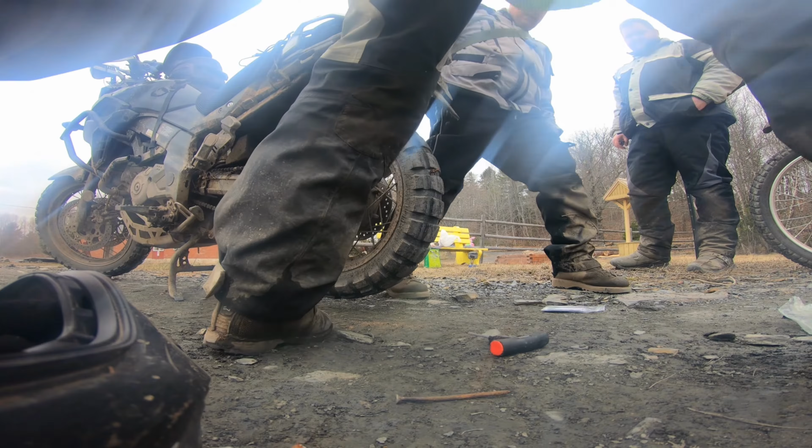That was terrifying.

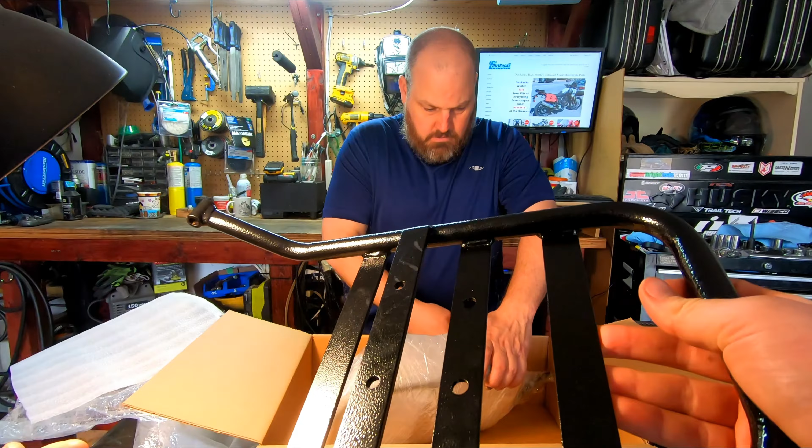Let's look at the welds, they look pretty good. They look good to you, Colin? Smooth and well done, yeah, they've cleaned them up really nice. You've seen us weld on the channel before, as you know we're all about function over form, so when we see nice welds, we give credit where credit's due.

That is well done. We got a kickstand to weld up on the DR. First trip out, Pete managed to break it right in half, yeah, broke it right in half on a big old rock. Well I guess I know what I'm doing later, we're going to weld up Pete's kickstand. And we're not just going to weld it up, we're going to plug it and weld it so it'll never break again.

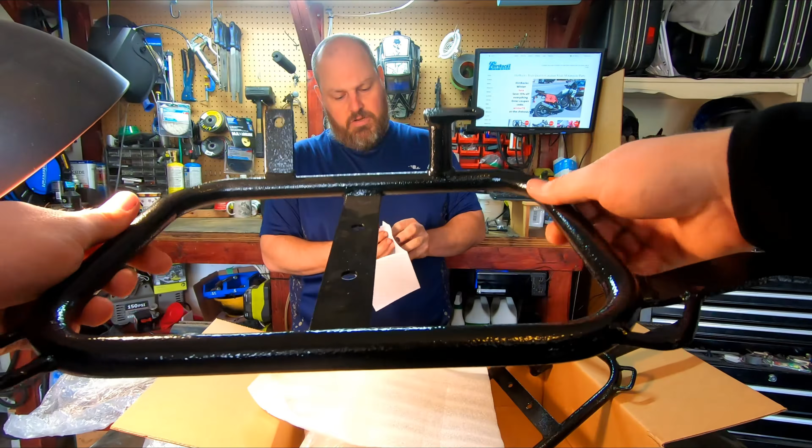Beautiful welds. Let's see, these instructions. They're large, they're bold, they're legible, they're in English. And if you want to know how small of a company this is and how good personalized service you're going to get, there were typos and they corrected them in pen. So somebody personally looked after this.

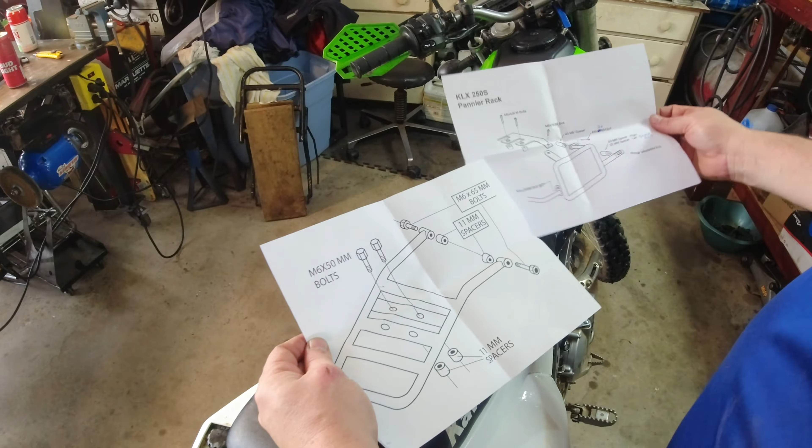Pannier, so we've got, that's the top part. And now the one thing I'm confused off the bat is, do we do the top rack first before we put this piece in? Zip, zippy, zip zip.

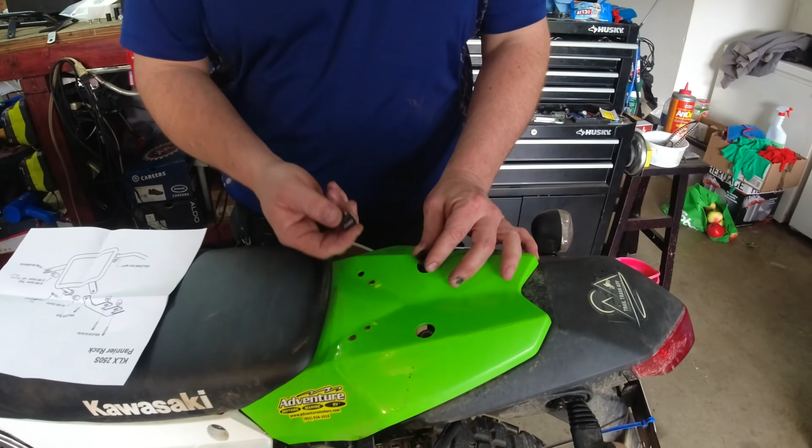I'm not a mechanic, but I play one on TV. So, spacer. I think they probably take up the factory spacers. This comes factory with a little pouch. Boom, just like that. So we've already taken that off, and we installed a Rotopax-style mount, no name brand, for the 5-liter fuel can that we carry, because I make Colin carry all the fuel. Bang, bang.

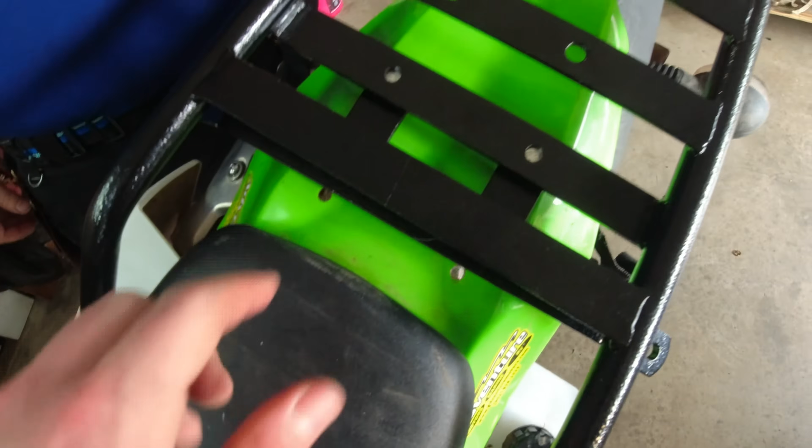So before we bolt that down, let's see where everything's going to line up. All right, so yeah, we're going to want to put that, that's going to line up just like so. So you're going to want the rack on first. Bam, bam, so yeah, I assume that's how they're going to go. So we've got 2 more spacers that go there, and this one goes over here.

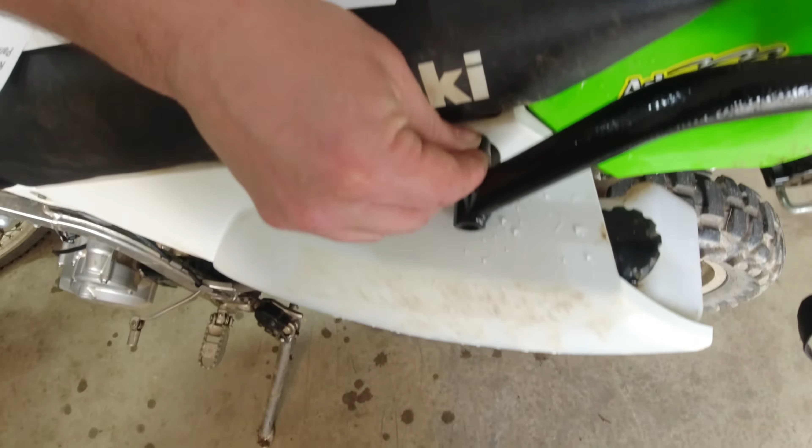Now they give you 2 different lengths. So those should stay in there. Beauty. Now it does say 11 mil spacers, and they gave bolts here. So I don't know whether you need to put the spacers in between here, but I don't think I want to. I want the rack hugging the bottom, so I don't know if we need to put the spacers in there.

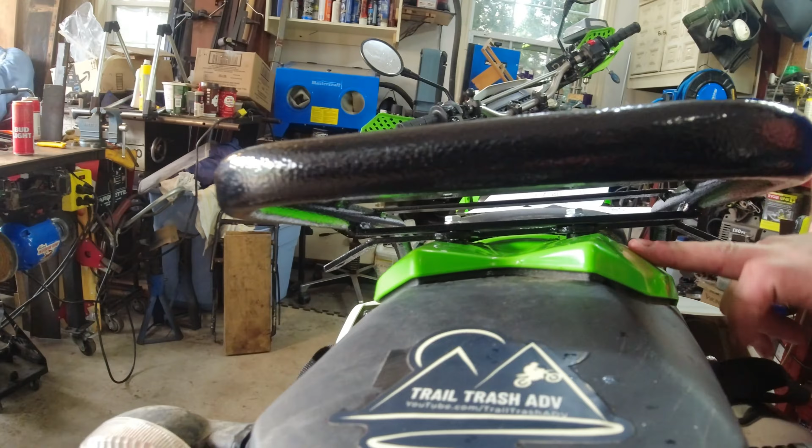And that's not on the plastic. Let's try that for now. All right, yep, so where we are.

Lining these spacers up, I see why they designed it this way, but it is kind of hard to get this in, lining these spacers up. So you've got that spacer, then you've got this, and you got to get this through.

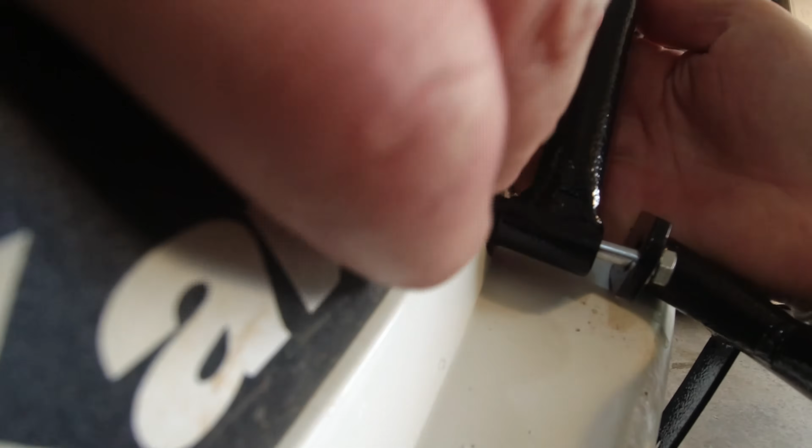I just want to make sure. So it doesn't look like it, but there's actually this main metal piece, and then there's an additional spacer behind it. It's not just 2 separate pieces. So you got 1, 2, and 3. But then this has to go through the plastic, then through the seat mount, and then into the threaded bungs on the frame.

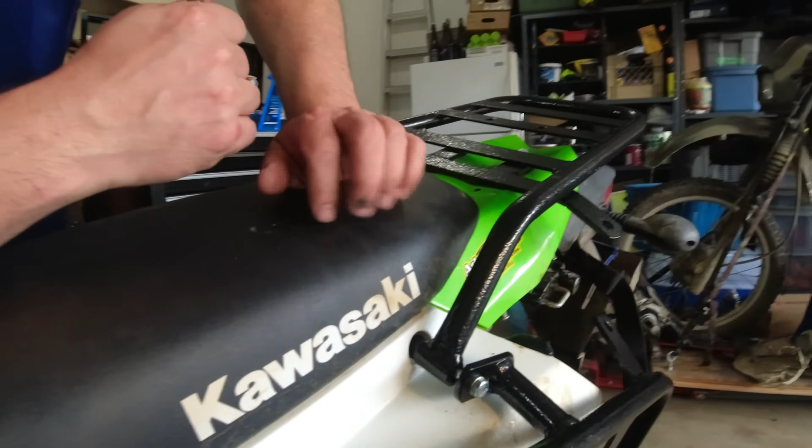So it is not the easiest thing to set up, but I don't think you're going to have any difference with anything else. The spacers need to be designed that way so that you can get them in, where there's a recess in the plastics, so you wouldn't be able to separate this and get them in the plastics otherwise. So I see why they had to do the spacers that way. But full disclosure, it is kind of funky trying to set this up.

So to make everything line up here, I've left things loose. What we're going to do is get these things lined up and then get this nailed down. That's true with any install—don't tighten stuff down until you've got everything lined up where you want.

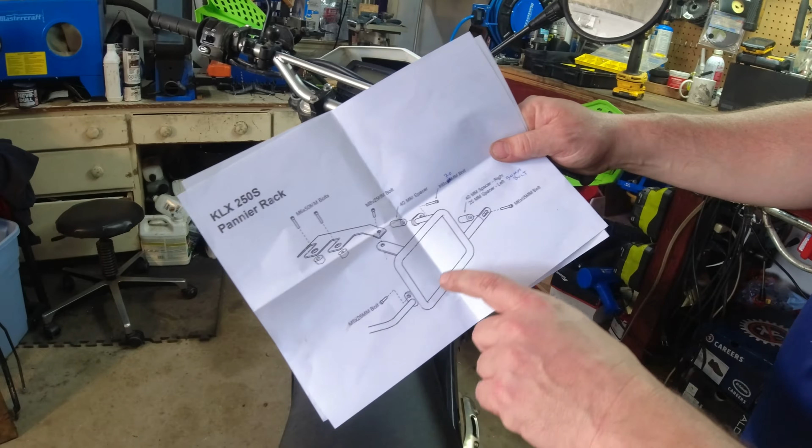Now, the only other thing I'll give them a little crap for is that we have instructions not for the heavy-duty side rack, but for the multi-use pannier rack, because they're talking about a bar that goes around the back here. This bar here. Our set does not have this bar. So we've got the other rack system.

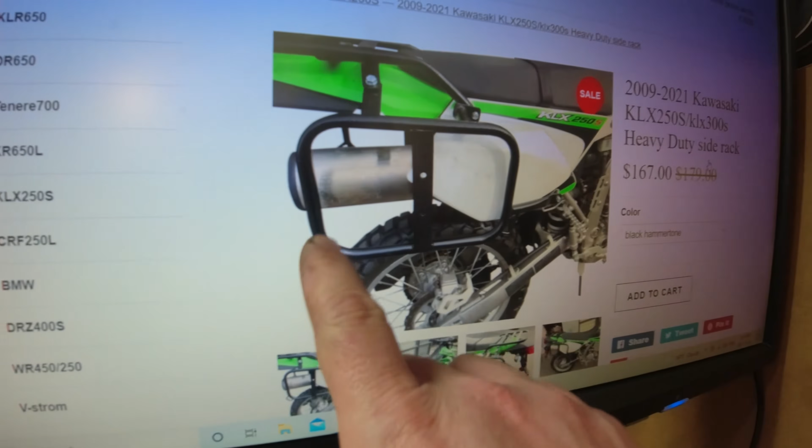If we go back, here we've got the heavy-duty side racks. It's a little odd why they call this the heavy-duty side rack, but it doesn't have the stabilizing bar that goes behind, and the other one's called the multi-use. But yeah, whatever—maybe it's a thinner gauge, and that's why they use the wraparound bar. Maybe, who knows. But this instruction booklet is for that.

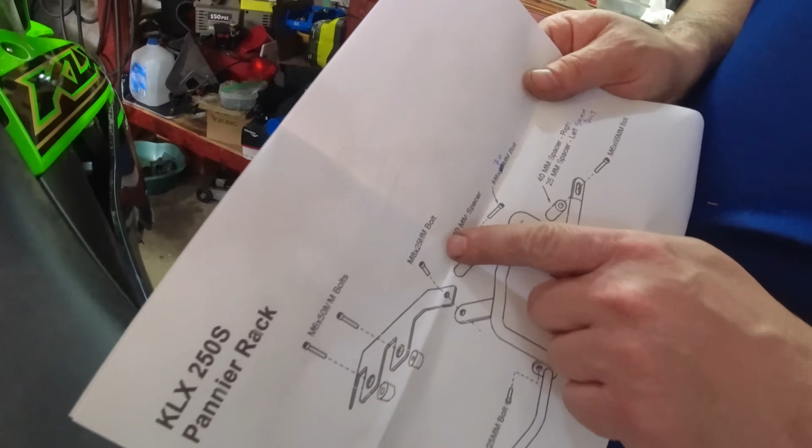So we're going to push on no matter what. The next bolt I want to get in is this M8 by 25 bolt, to get these in.

But so far everything's lining up fine. That wasn't it? No, it wasn't. So anyway, we're going to do this in real time so you can see it is a bit of a frig. But again, you're going to be friggin' no matter what set of panniers you're putting on. I'm not going to gripe about it, because I see why they designed it the way they did—I don't think there was a way around that.

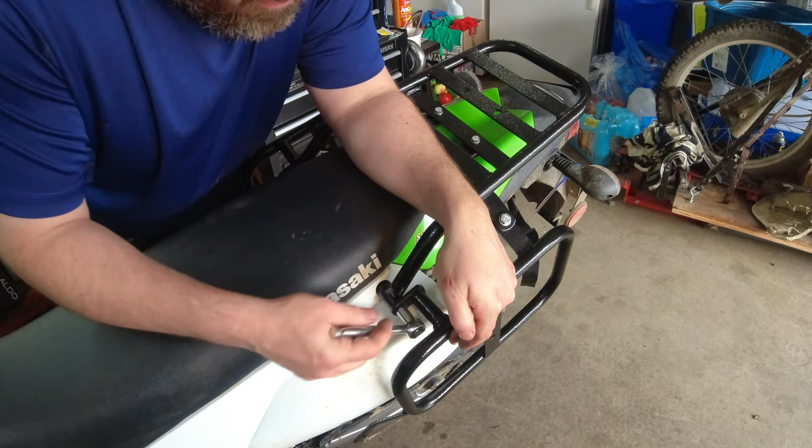What am I looking for? I'm looking for a 10 mil. Let's see if I hit it. Yep, I think so. Okay, so we'll get some nuts on that, and then some lock nuts, which I'm a fan of—hey, lock nuts!

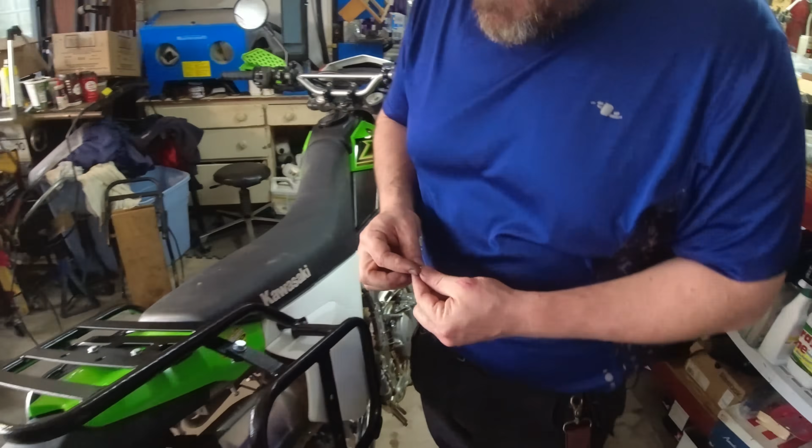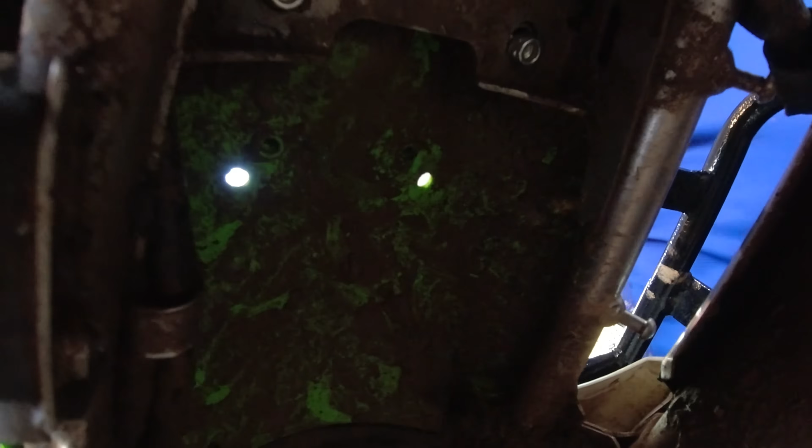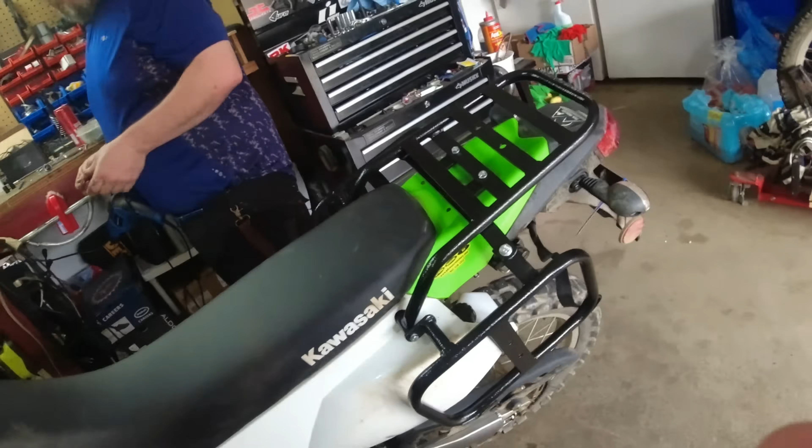All right, that sinks in up there. So we may need the stock ones? Yeah, the stock ones. I might need— the thing is, these racks were initially designed for the KLX250, and since the 300 has come out, since nothing has really changed, they're about the same, except for the size of those washers on the bottom here. They're slightly, very slightly bigger.

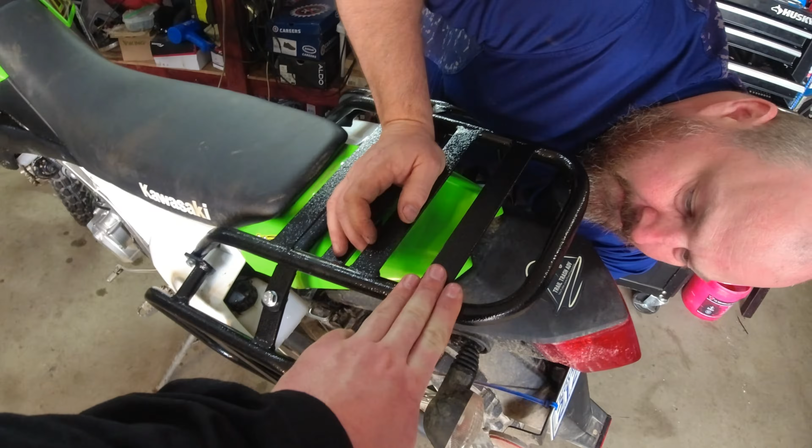Get enough threads to bite, so slightly longer bolts for the back rack would not be a bad idea. What would we say, add another 10 mils? Yeah, I'd say the 60s would be better, just a little bit better. You don't want too much sticking down either, because your tires hit it. And then slightly fatter washers. Yeah, other than that, thus far, all is well. I mean, it could be because we're using 2 layers, right?

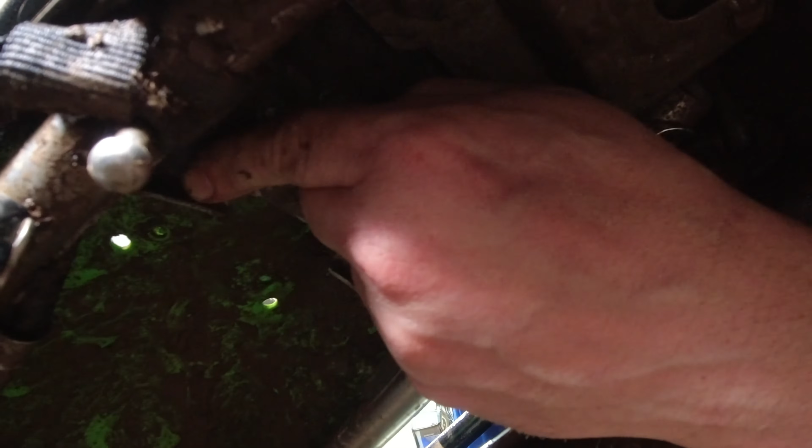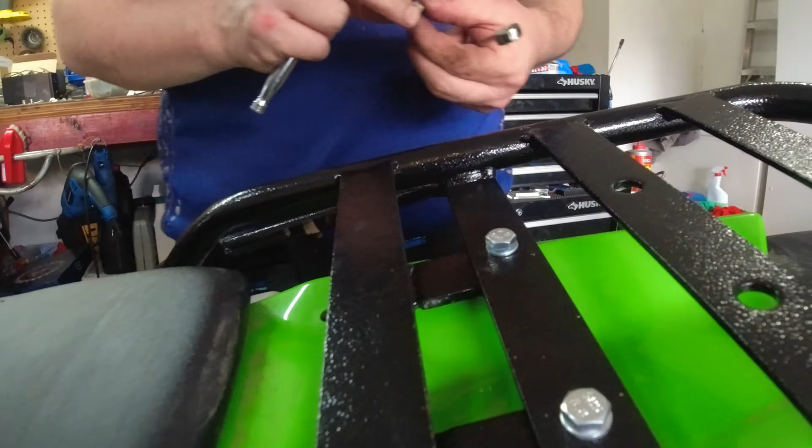It could be like the 50s are long enough if you're using the side racks. What Jeff's saying is essentially we've got this piece of metal here that the rear rack mounts with, and then we've got another piece under here that's sitting on top of the rear rack, meant for the side panniers. Maybe that little extra length is what's causing us issues.

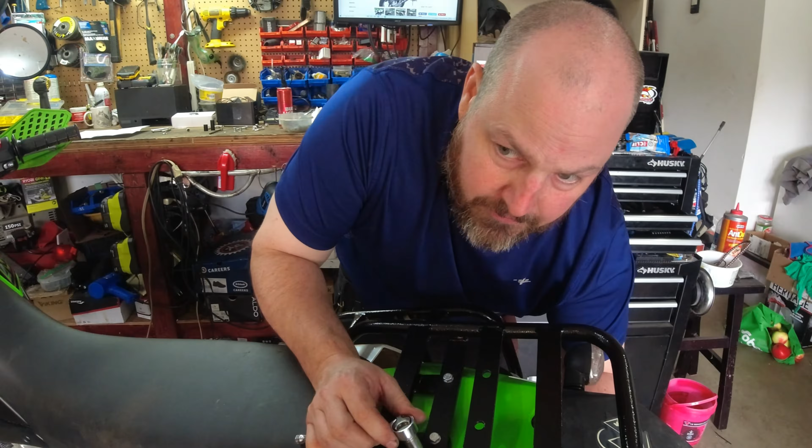So maybe the 50 mil bolts could be just fine for one or the other. If they went to a 60 mil bolt instead of a 50, that would give you just a little extra, so if you're installing both systems, you've got the length you need.

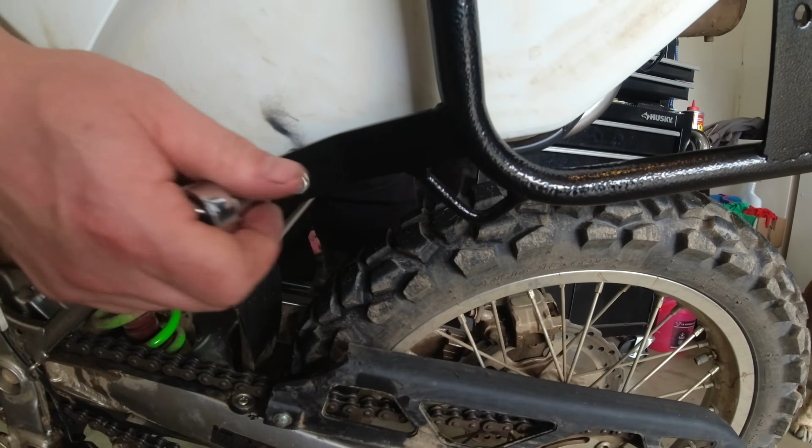Basically, we lined up really great on this side, on this lower mount. Over here, we didn't line up perfectly, but by putting forward pressure on this and taking any slack up through them, we've got a fit here. So I was able to get things lined up enough.

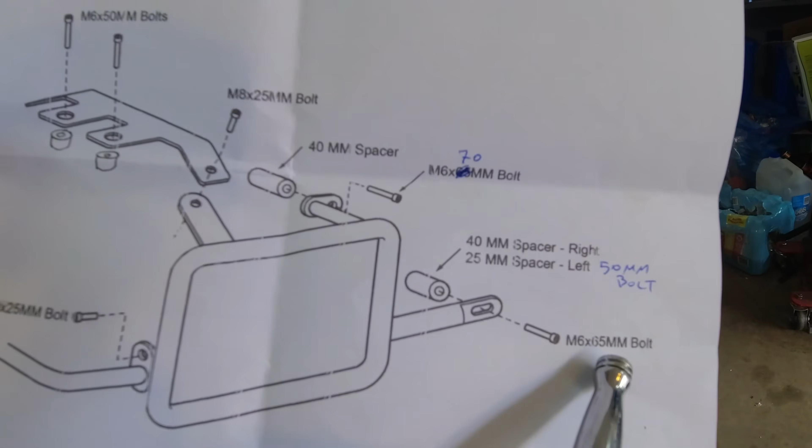They are a little asymmetrical. If you look at the instructions booklet here, they say this needs an M6x65, but I used a 70 here. This 25 millimeter spacer on this side, which is this side, but that's actually the 40 mil spacer. So that's a 40 mil spacer. On the other side over here was the 25.

Marks for instructions in English, marks off for instructions that aren't accurate. I mean, they are if you interpret it that way. It's fine, so if you interpret them correctly, the instructions are correct. It did throw me off because those instructions do look like they're for the other pannier system.

There is really nothing to this install. No, I mean it's pretty good. If I'm being nitpicky, I would like to see those corners rounded a little more, so that they're not sharp per se, but I'd like to see those rounded a little more.

There was some massaging to get it to fit, but I think you're going to get that anytime you're doing anything that's hand welded. And I appreciate the fact that it's hand welded, right? I appreciate that they're a small company making stuff that's affordable. Big plus for affordable. Yeah, lifetime warranty with it as well, so they're standing behind their stuff. So it's hard to complain about the little things.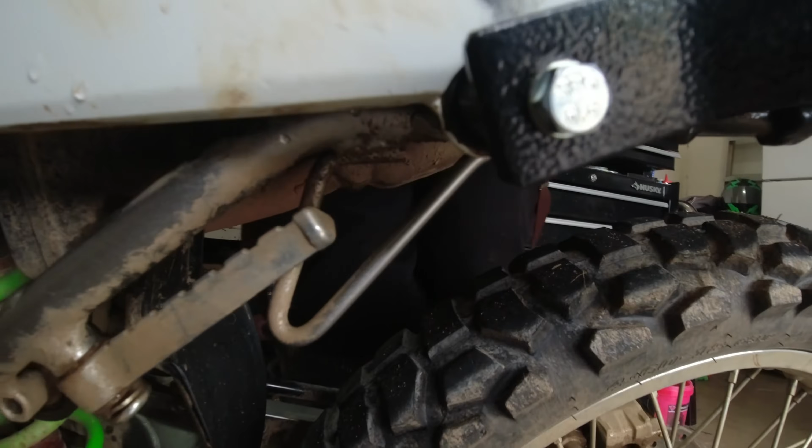The thing is this one over here, if you look at the difference, you see how that's rounded? Oh yeah, I see what you're saying. Nice round profile there. This one's just slightly more squared. Yeah, squared up. But these are nitpicks. Okay, Jeff's good at being a nitpicky ass.

I'm using a 1/4 inch drive because I don't like to over torque stuff and strip it out. And that's my only hesitation, how they're going to hang up, how they're going to stand up to crashes, is the fact that these are long M6s that could possibly deform in a crash.

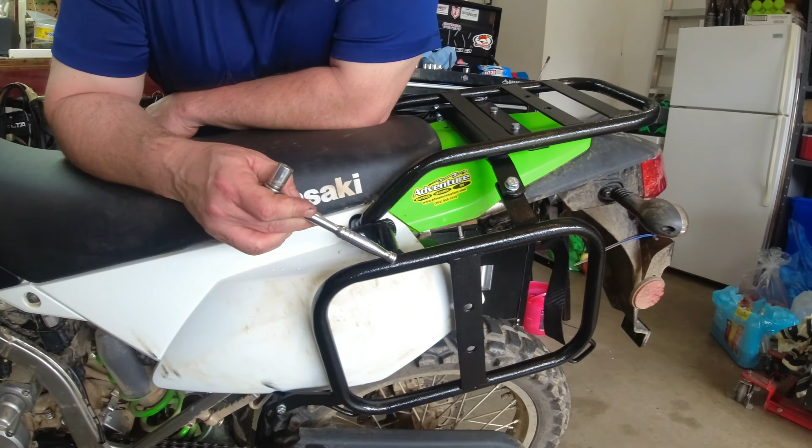However, if you look here, you've got this straight line right here, and then you've got the small jog. So when your crash goes over, your weight's going to be separated. You've got a straight line here, and an almost straight line here. So this metal is what's going to take the brunt of the crash on the front side of the bar.

That's not a huge space. So my confidence is pretty good that there's going to be no horizontal torsion on that bolt. It's going to be all straight in impact, because this is all in line as far as this way, and there's only that small jog this way.

So if you take a side hit here, this is the only weak point you're going to have, and it's going to be supported back here in a straight shot. So that could mean that the crash protection is going to be pretty good.

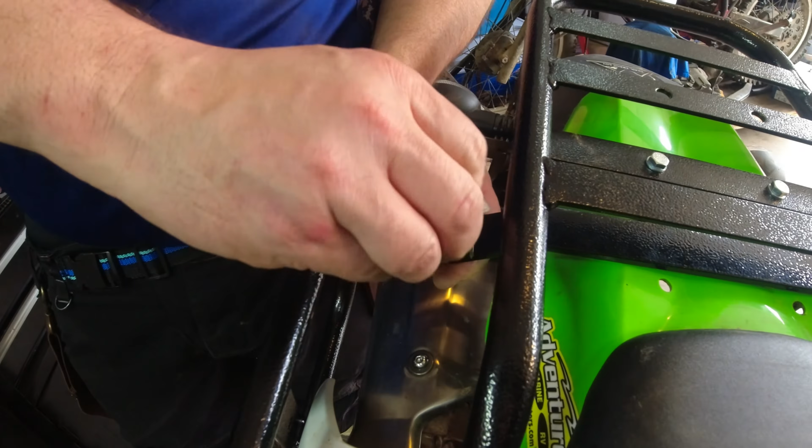How many times am I going to try this before tomorrow? 13. So now that we've got the sides all fitted and tightened...

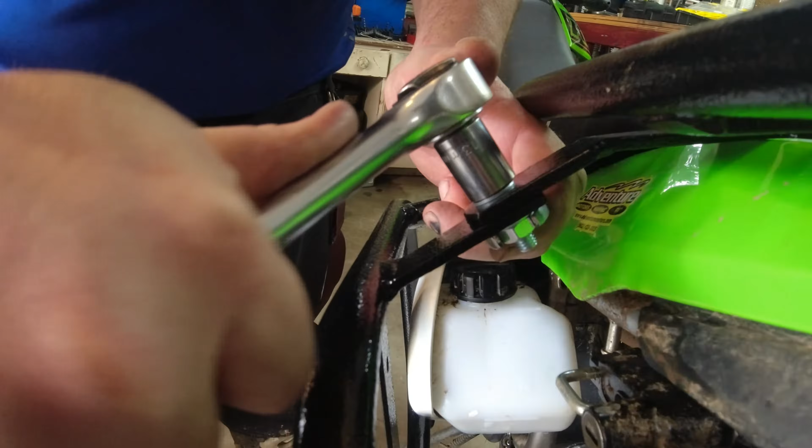Now we can tighten this up. All right. Well, there we go.

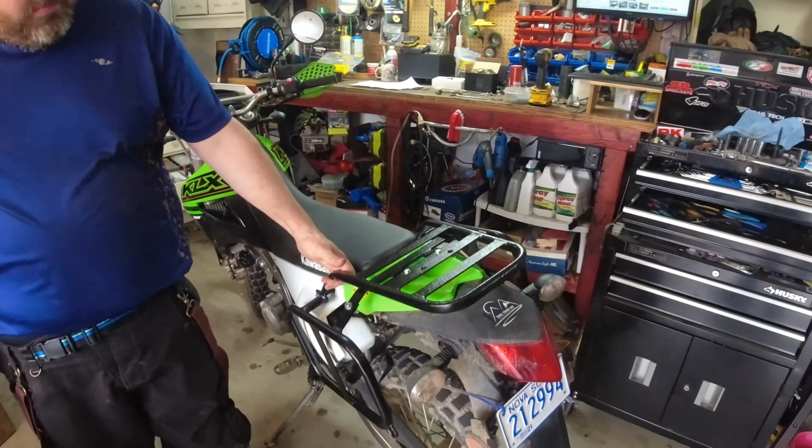Pretty beefy, actually. It's the strongest piece on the bike, beats that rear fender.

Yeah, but look right here. So this is the only flex point, with this being a multi-part piece. That's the flex on it, right? But I don't think you're ever going to have flex that way, it's only going to be flexed this way. Yeah, it's true, but you can see that M6 bolt bending a little bit if you take a shot right there on the tail end. So we'll see how it lasts.

I hate to say things like, oh, it's good for the money, but that's good for the money. That's not a lot of money to pay. If you put that up against the competition, you're gonna pay almost twice as much.

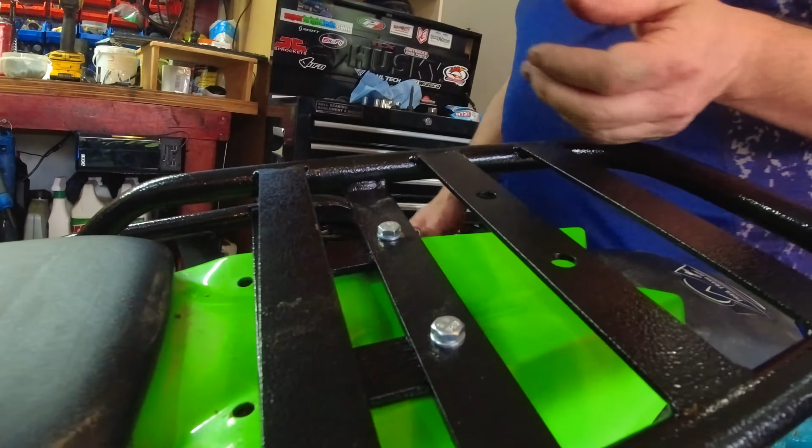The other thing I really like about this is the fact that this rack system is multi-layered. So we actually have space, like if you're going to bolt here, you can get up under here with nuts, even though the pannier rack system is down here flush. So I like how they designed that, that's a really nice touch, the fact that you can get up under here with straps or nuts if you're going to bolt anything through.

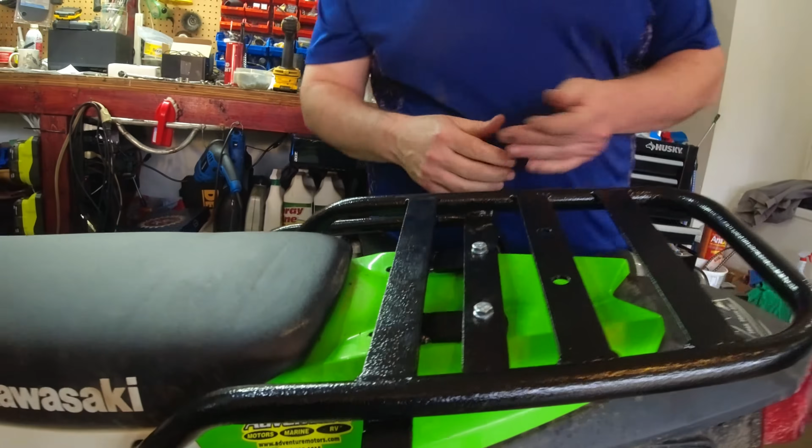And that's still that 5mm steel, so that's actually pretty good. Is it perfect? Pretty close. For the money, it goes beyond my expectations. For that money, no question.

So look forward to a future review, a longevity review, how it's going to stand up to some pounding, and that'll be coming shortly your way at some point here in the near future. So for Trail Trash ADV, I'm Jeff, Colin's behind the camera, we'll catch you on the next video.

You know, when I told him we were going to do an installation video, I'm sure this is not what he thought he'd get. Hey, you should check our channel out, because that's what we do.

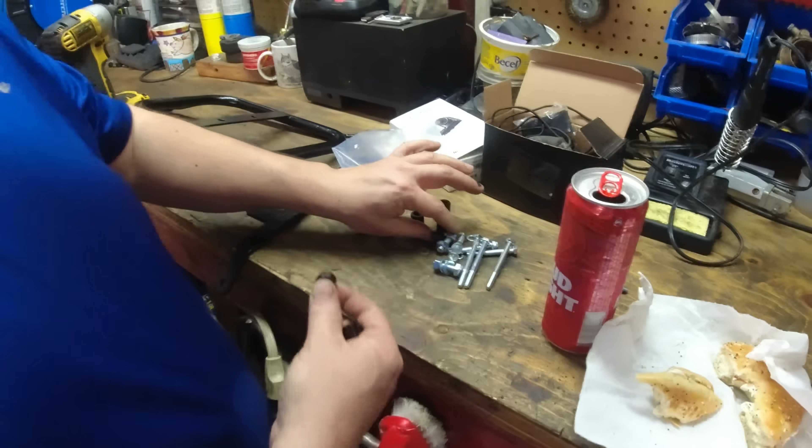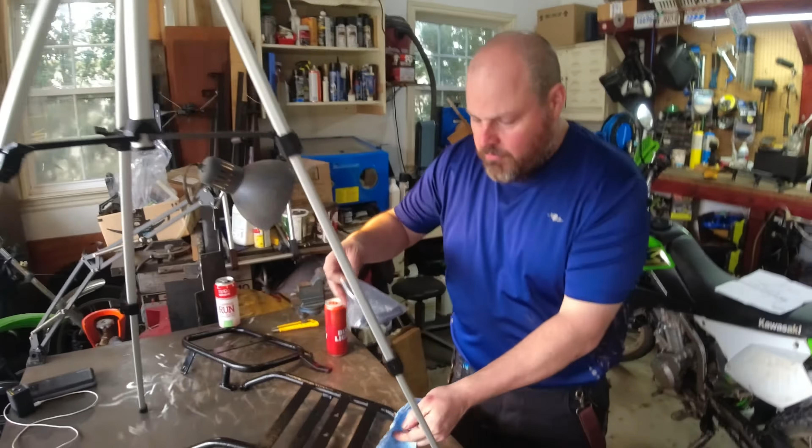Oh, Jeff. Oh. You heard that here first, Jeff's gonna get on his hands and knees and take a short break.